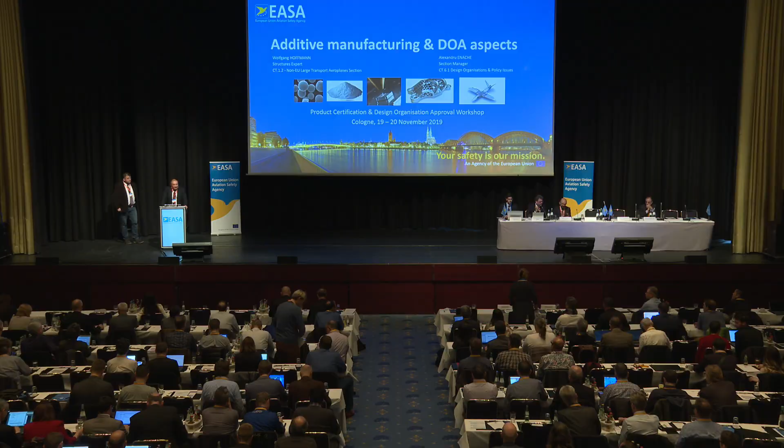Yes, we are here this morning to try to provide you some information on additive manufacturing and some DOA aspects related to this. First of all, thank you for proposing this topic to the agency for this workshop. In the survey we ran before the workshop, additive manufacturing scored quite high, so that's why we are here today in front of you.

How we built this presentation? Together with Wolfgang, who is a structural expert in the large airplanes department, we thought to have two parts. In the first part, Wolfgang will go with you through some technical aspects of additive manufacturing, including challenges, the EASA strategy, and some events we are organizing on this topic annually. Also, he will present you some developments in the area of industry standards and some available guidance material.

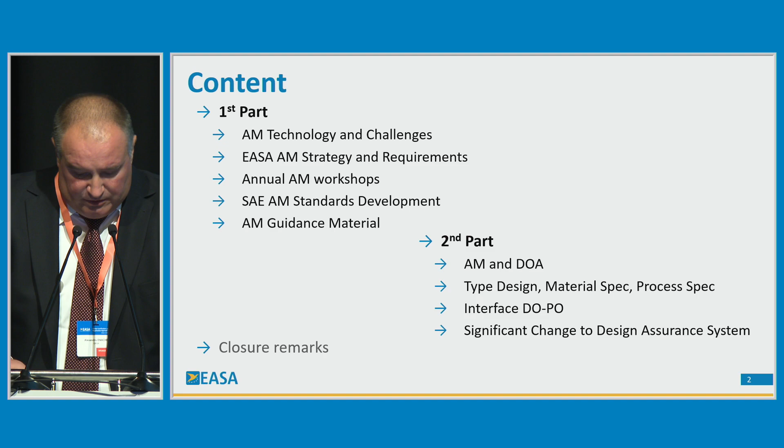In the second part, I will touch on some DOA aspects: type design, material specification, process specification, interfaces, in particular with production organizations, and also what is the impact on the DOA, whether we have a significant change or not, when a DOA is contemplating starting additive manufacturing activities. And in the end, some closing remarks. So I will invite now Wolfgang to go with you through the first part. Thank you, Alex.

I have to take a deep breath because there are a lot of people here. Let's put the focus on you first. May I ask you a question? How many of you can raise your fingers, have to deal with additive manufacturing technology currently? Okay, well, it's somehow congruent with our general observations. So I think I can focus a bit more on the first three introductory slides, which are more technical, to explain what it is.

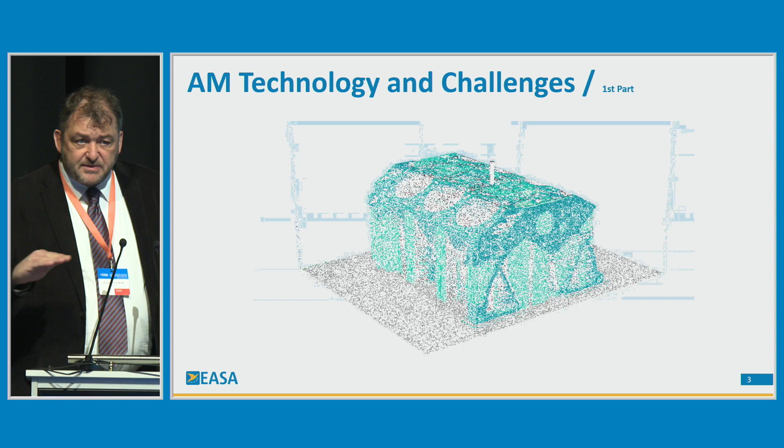But there are different technologies. They all have one thing in common: you have meltable or fusible material, and you melt it layer by layer and build up the part after a certain long time. Different technologies for this are available, so you can do this with laser melt techniques, where a laser is melting the material, or with an electron beam, which is also melting the material. In detail you have slightly different possibilities with the methods, and advantages and some disadvantages when you compare them.

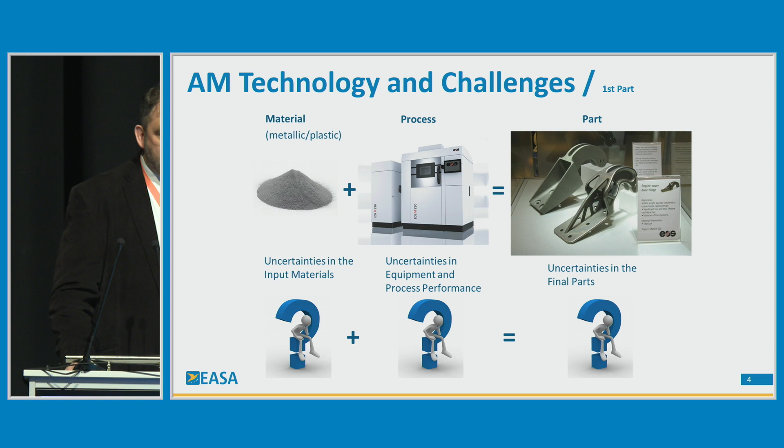So we go to the next slide. When we see this technology, it's quite nice actually. You have a starting material, feedstock material we call it, which is mainly metallic or polymers. You can get it in the form of powder or in the form of a more solid wire or piece of plastic, and all this will be melted in the second process in a machine, which you see there, which shouldn't be a black box. It should be more a white box like it is depicted here.

With white box I would like to express that you should know what the machine is doing in detail, because it may have influence on your material which comes out, on structural strength or fatigue properties. And then finally, after the print process, you will have some nice shiny parts. They're looking good, just ready for installation, you would think. But this is not really the case, so you would have to do some post-processing for this part.

So that means surface finish to remove the surface roughness, which also can initiate cracks. And you would have to be sure that the bulk material is really okay, no voids in there, no hollow things with unmelted material. And so you have a lot of uncertainties in the final part. You have uncertainties in the machine, and you have uncertainties in the input material.

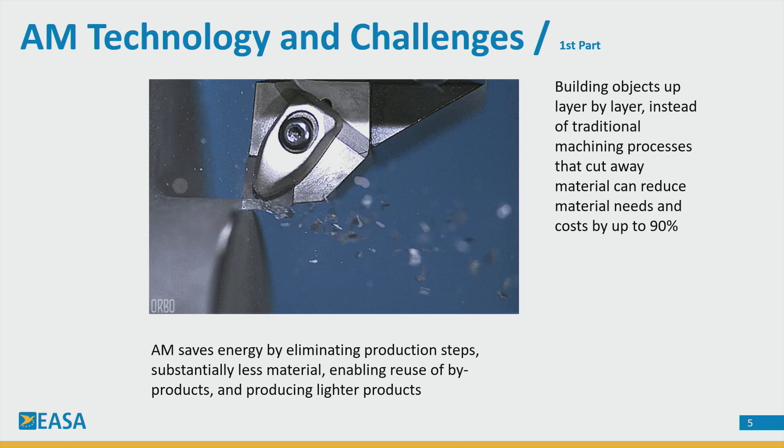So this is the old era, you know. We have a big piece of metal. We machine it so that we finally get the form or the shape of the part. And of course, you are producing a lot of metallic waste. You would have to reuse this, and so it costs a lot of money. And this is a big disadvantage.

And with additive layer manufacturing, you can build an object with just the material you need, more or less. You build it up layer by layer, and you don't have so much debris. And you have other really big advantages. You can reduce the material needs and the costs up to 90%. This is a maximum value, I would say. And through specific design you can also do a tremendous weight saving, up to 40%.

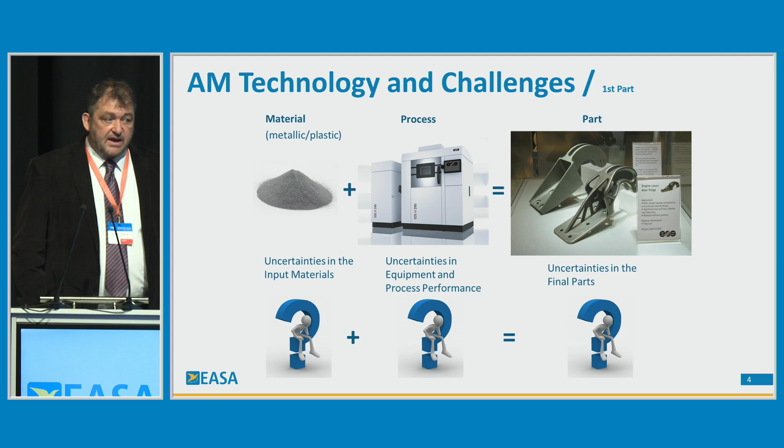So the parts which you see there on the right side: the part in the background is the original part, and the part in the foreground is the part which was additive manufactured using a specific design, where you just leave the material where you have the load path transfer. So for this part you can really have a weight saving of 60%. This is quite something. Okay, going back again. So we don't want to do this anymore. Of course, the optimum thing would be if you could print everything.

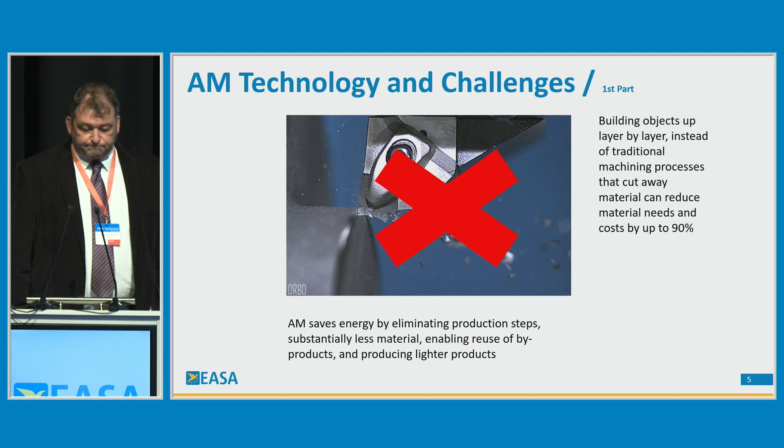And there we have to propose our strategy. As an airworthiness regulator, we are being approached by such a technology, and we don't know that much about it. So we have to gather some experience, and we have to rely on information exchange with the industry to understand the technology and the processes behind, the product which is being produced, and its dedicated use in aviation. So this is a very important thing, number one.

The second one is we have to identify potential safety and environmental risks. Is there a specific risk on the part when we don't know the material properties, or there's a widespread in material properties? Of course there is a risk, and we have to be aware of this and try to mitigate those risks. So we are working closely together with the industry to get all this information and discuss all those things, and also with the NAAs, who are responsible for surveying the POAs, the production organizations, who are applying those machines.

The further step is, once we are aware of the risks and how we can mitigate them, we have to monitor the evolution. The machines will be developed further. They started initially with a one-laser machine for metal melting. To make it easier, I will just refer to the metal process; there are others as well, but there's too little time to explain them. For metal melting done with a laser system, they started with one laser. In the meantime, we have quad laser machines, so 4 lasers doing the melting independently.

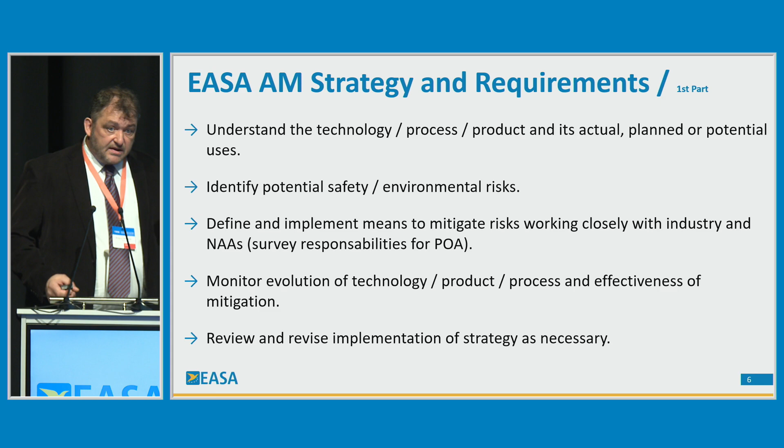And this is a further development, and we have to see if this has an influence on the product as well. And we have to check if our means of mitigation are still effective or not, or if we have to do something more. That means we have to frequently review and revise the implementation of the strategy as necessary. These 5 points are our main strategy: first of all to understand, and then to track everything and the further development.

So I guess one of the main questions from your side is, do we need any new additional requirements to cope with the new technology? So we have to do more effort to show more substantiation, which is, of course, involved by spending more money. And this is possibly not very much appreciated by you.

The answer is, currently we don't need new requirements. So our top-level requirements, Part 21, the CSs, are enough. They cover everything. I will come later to the main paragraphs which are dealing with this. And we mainly would like to remind how repairs and design changes have to be done in detail, and what is the impact of AM on design organizations or on production organizations and on maintenance organizations. So this will be explained a bit more in detail in the second part by Alex.

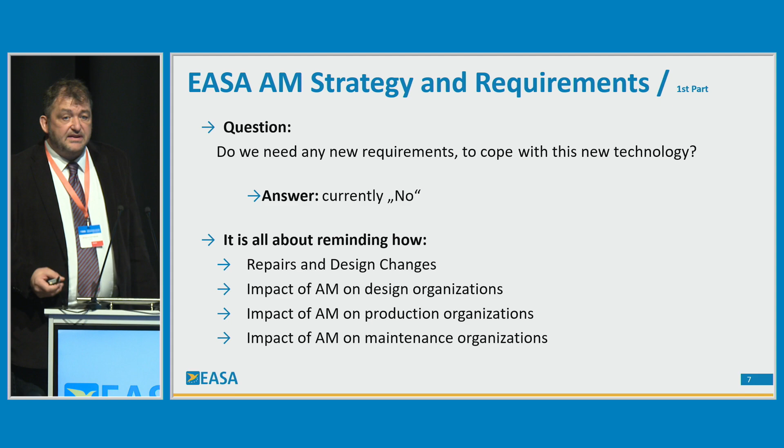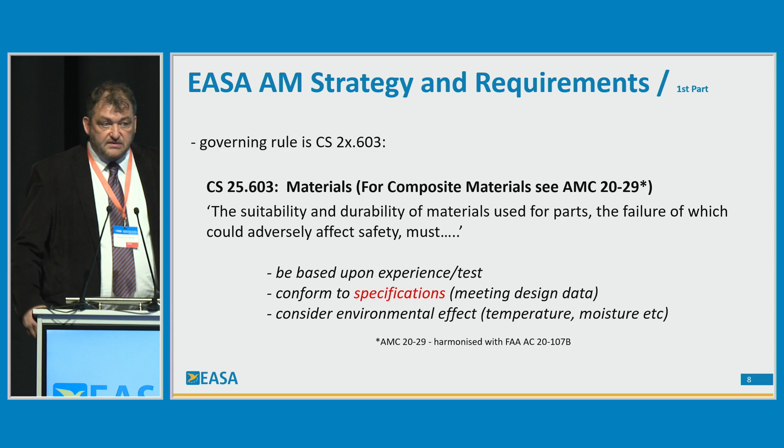The requirements. So the governing rule is the 603 requirement for materials. It says the suitability and durability of materials used for parts, the failure of which could adversely affect safety must be based upon experience and test, conform to specifications, meeting design data of course, and consider environmental effects, temperature, moisture, etc. So this is the requirement we start with.

The next two about the materials is, starting with the 605, the fabrication method, and this is the additive manufacturing, obviously a new technology, a fabrication method. They must produce a consistently sound structure, so without any spread of material properties, in the best case. And this is where we have to be sure. So if a fabrication process, such as gluing, spot welding, or heat treating, or let's say the laser welding process comes close to the additive manufacturing with laser melt methods. So all this requires a close control to reach these objectives.

The process must be performed under an approved process specification. And to the process specification we come later. It's also a very important thing. This belongs to the EASA strategy as well, that we are involved in developing those process specifications. And we have the B, each new aircraft fabrication method must be substantiated by a test program. Okay, that says all. So when you buy such a machine, it's a new method, you have to do some substantiation.

What would be the extent of this substantiation? Well, it would depend on whether you would like to produce critical parts, safety critical parts for an aircraft, then there's a lot of substantiation, and we would switch to the 613. If you have less critical or non-loaded parts, let's say polymer material in the cabin, kind of armrest cover, well, you would possibly just have to do the fireproof testing, and that's it. So this is not safety relevant if you have there a broken material finally. So that shows a variety of parts. It depends on the criticality.

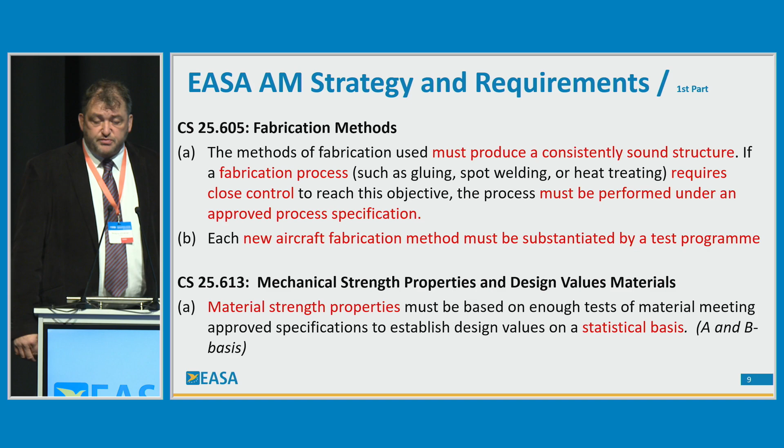So the other side of this is, to gather experience on this new technology, we just arrange workshops with the industry and with other authorities together. And the first of them were quite generic, just doing presentations to see how far the people are, what are they doing.

We did the first one in 2016 in Cologne, and a second one the year after, and it turned out to be a good thing to do every year. So you see the development. The first two were generic, to get a rough overview of what is being done with this technology in the industry. Then it gets more specific, similar to this workshop here, with breakout sessions before the presentations, so that all participants can really discuss the points which are very important for them, to discuss their needs.

We've tried to do this as well now, so we've changed to a more specific topic on additive manufacturing. One of the first ones was 2018, with machine knowledge and training, so we invited machine producers and users, and let them discuss what are the needs. We found out that for the machine producers, it was very important to know about the requirements in aviation as well, so that they can tune their machines and understand the big need for precision and repeatability of the material.

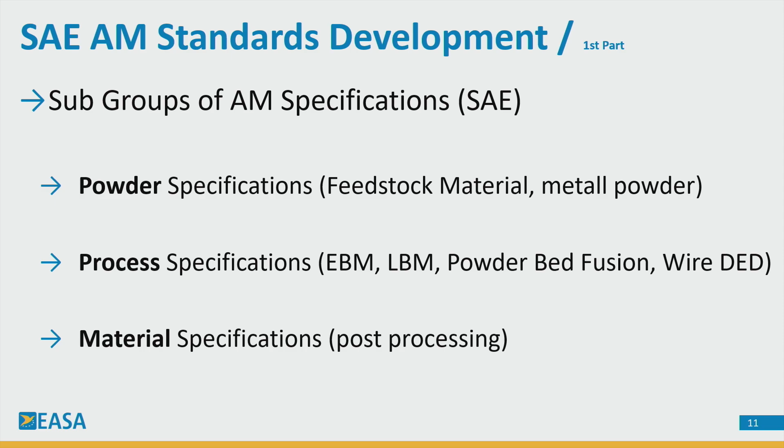Do we have to do post-processing of the material? For example, there's a very famous hipping process, hot isostatic pressing. For some small voids, which are let's say non-really melted powder in the material, for small areas, you can heal this material via post-processing. The hot isostatic pressing is done at high temperature for 3 hours and under 1,000 atmosphere. You leave the material there - it's short below the recrystallization temperature, and it will be healing, and small voids will be vanishing there.

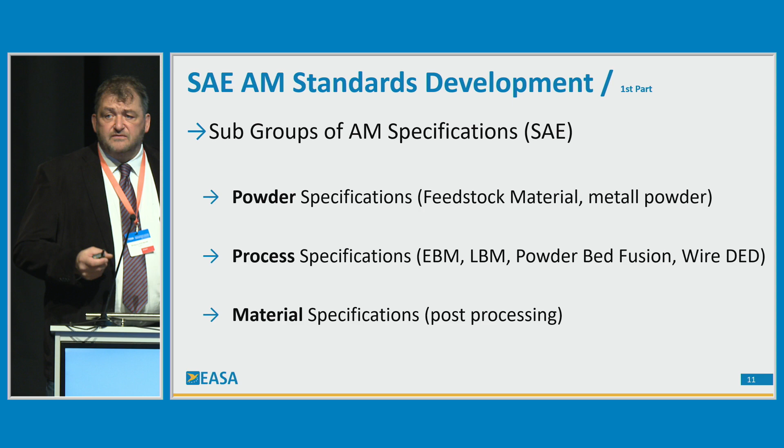So it doesn't prevent you from doing fatigue tests on those samples as well, but it's solvable. Some OEMs have shown when they put a lot of effort into this, they have a high repeatability, even higher than for castings. For castings we have factors we put on those to cover flaws in the material. For additive manufactured parts, some OEMs who put a lot of effort and money into this found out that if we do so and hold all processes stable, we even don't need a factor like for casting. So it seems to be a good way.

This is what we are working on. The green ones are the published standards from SAE.

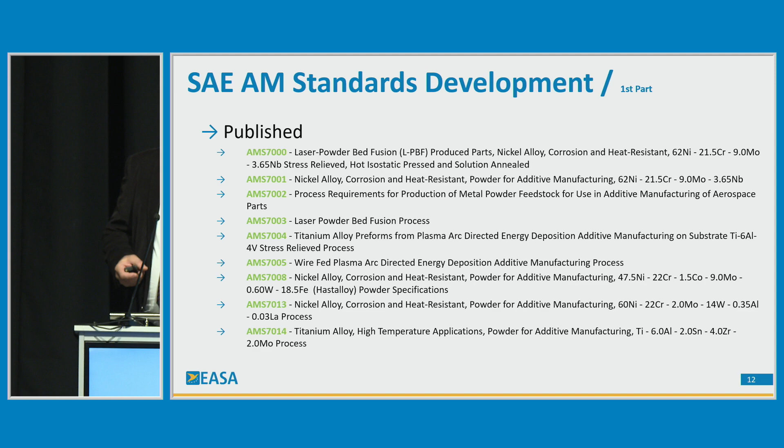You can just briefly read. You have powder specifications, laser powder bed fusion process specifications, the 7003, and so on for different materials. You have Inconel materials, and the most advanced one is titanium 64, so it's 90% titanium with a bit of aluminum and vanadium.

Those are already published, so you can purchase them, and if you want to use one of those materials, the strong recommendation from our side is please go into the specifications and try to work along them.

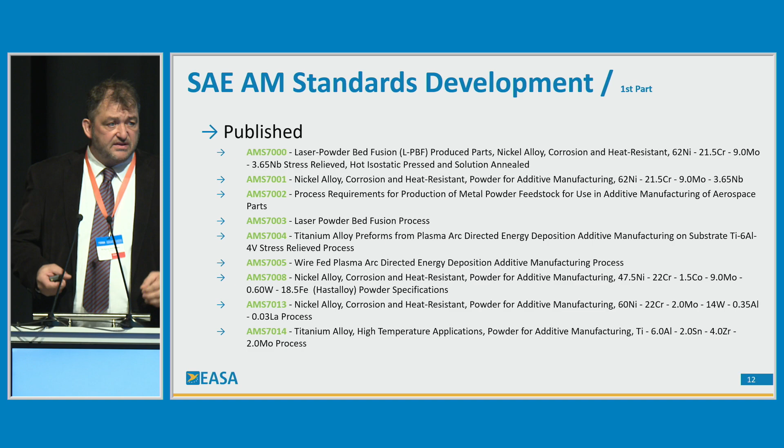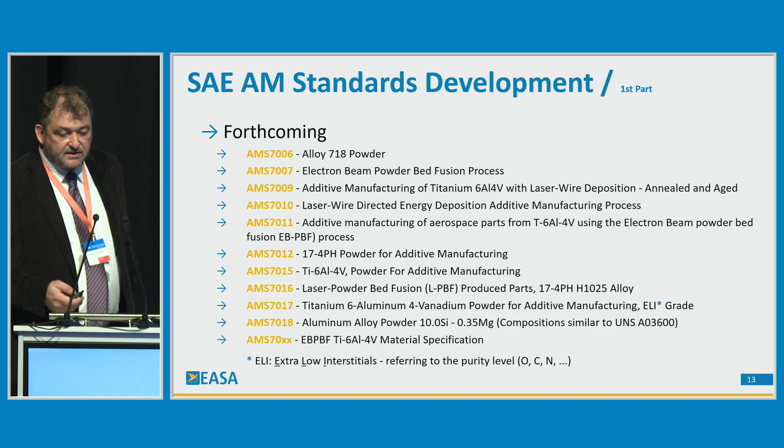Those forthcoming ones are these here. They are still not published, but they will come. For example, a process specification for electron beam powder bed fusion and so on. This is something where you can take some time and just go through it and make yourself confident with it.

A further thing is we try to give you a bit of guidance. For that reason, we are tracking the technology, trying to get information to be experienced, and not to say we can't say something on this because we don't know anything. We know indeed something on this.

In the meantime, we have issued in April 2017, just one year after our first workshop on AM, a certification memorandum which doesn't invent something new. It just reminds you what our expectations from regulator side are, which requirements are the most important.

I've just marked the red ones there. These are the structures requirements, because I'm the structures guy. There are some others - we see engine requirements, propeller requirements, Part 21, and so on. Those are mentioned there, and we have explained why we need those requirements and why you have to put more focus and effort on this under the light

of additive manufacturing. And of course, the purpose and scope of this guidance is that we would like you to really work on our expectations.

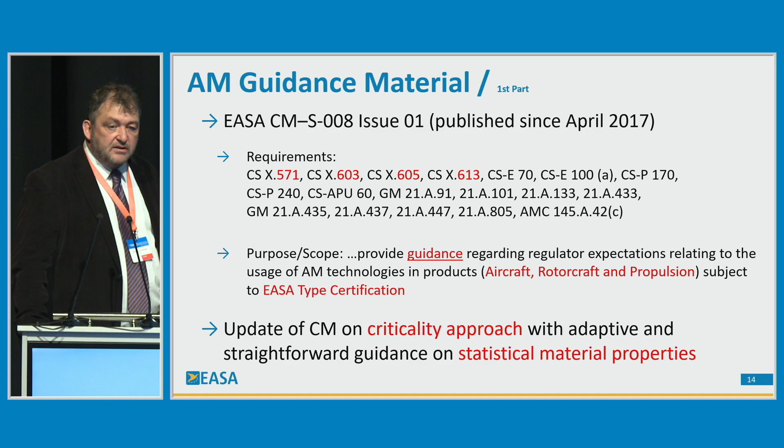yes, the statistical material properties - for them you may get an exemption for non-critical and less loaded parts. This is the idea behind it.

And the last slide from my side is: we will give you also some guidance for the POAs, DOAs, and MOAs. There's a possible need to increase awareness of closer relationship between those organizations, because of course there is an interface, so we would like to give some guidance on that, and to make you aware of the existing rules there.

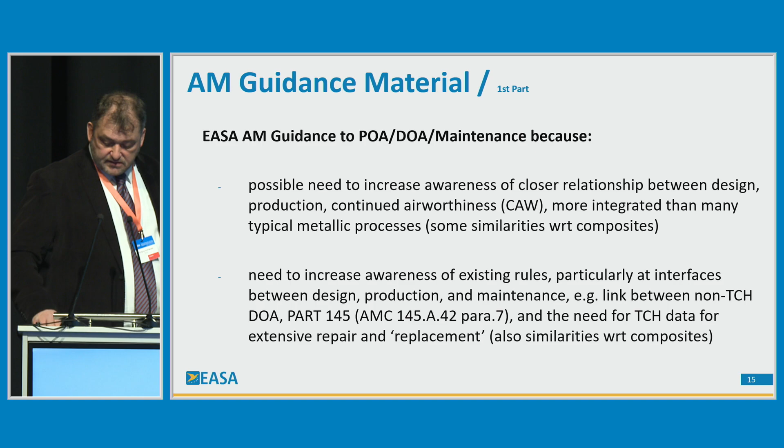Thank you, Wolfgang. After you have seen a little bit of technical aspects of additive manufacturing, we'll go now through some DOA aspects. First of all, I would like to show you a short, small statistics. We did, through the DOA team leaders, at the beginning of this year, a survey.

And according to the answers, still a limited number of DOAs are involved in additive manufacturing activities. I've seen earlier when Wolfgang asked you, I've seen a lot of hands in the air, but still that might be not so many DOAs yet involved in additive manufacturing.

There is also a large gray part here, so some of you maybe have not yet made up your mind and not provided feedback to us on this topic. I will come back at the end with, let's say, a recommendation for this.

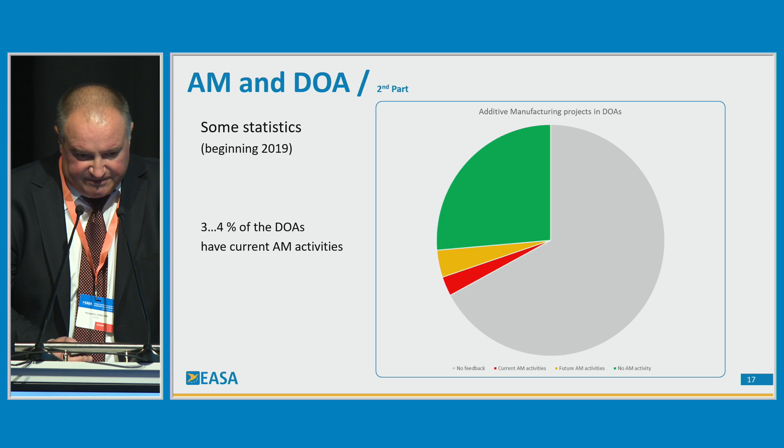Now, you may ask how a DOA may start additive manufacturing activities, and I took maybe a simple example. Hopefully nobody will recognize your design data here.

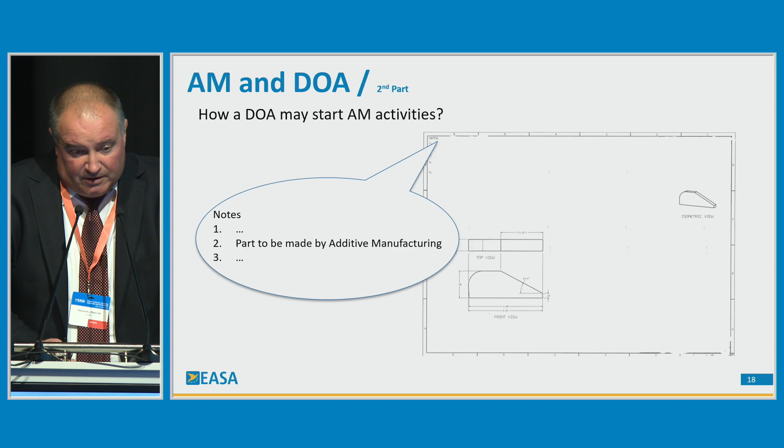If you want to manufacture a part through additive manufacturing, it will be enough to say in the notes that this part has to be additive manufactured. Maybe the answer is no.

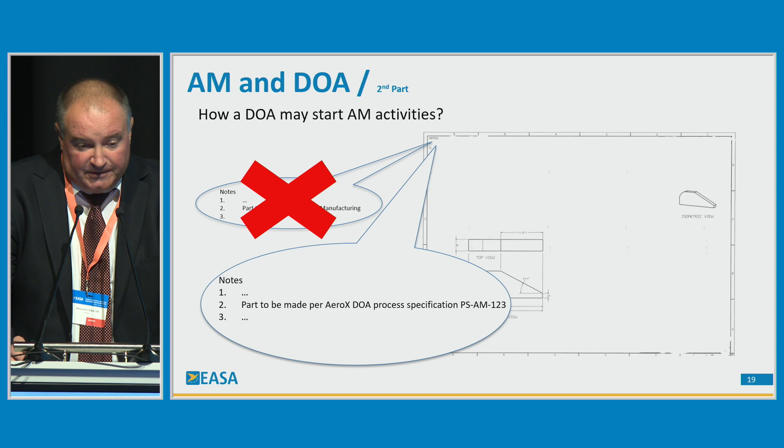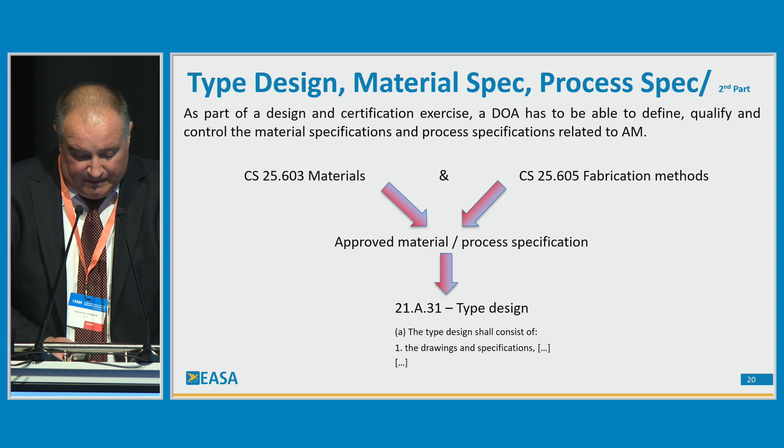You may need to actually refer to a process specification for doing this part through additive manufacturing. You have seen from Wolfgang's presentation that this process specification is particularly required in some of the CS requirements, some of the airworthiness code requirements. And if this is the case, then obviously your manufacturing specification, your material specification will become part of your type design. And as such, we are expecting a little bit more elaboration from the DOA side.

You have seen already that additive manufacturing is depending on a large number of factors. And depending on the particular application, loaded part, non-loaded part, plastic, metallic, different type of processes involved, you may have to come up with a process specification. I just want to present a few items which might be part of this process specification. Don't take this list as an exhaustive list, it's not.

You have to explain what is the scope, what type of additive manufacturing process you are defining, what is the applicability, what are the limitations, for example what kind of parts you may manufacture according to the respective specification. What are the materials? Of course you will have to refer to material specification, but you may also have to add handling requirements for the material, storage requirements, and so on.

What is the machine, equipment, and tool used for manufacture, including the machine manufacturer, the type of the machine, calibration, maintenance. Facilities are important as well. The machine environment may impact the result of the manufacturing process. And then you have to describe the process, the preparatory work, the printing steps, what are the key parameters, what are the post-processing methods you will apply to the particular manufacturing process. And of course you have inspection and test requirements and some part markings.

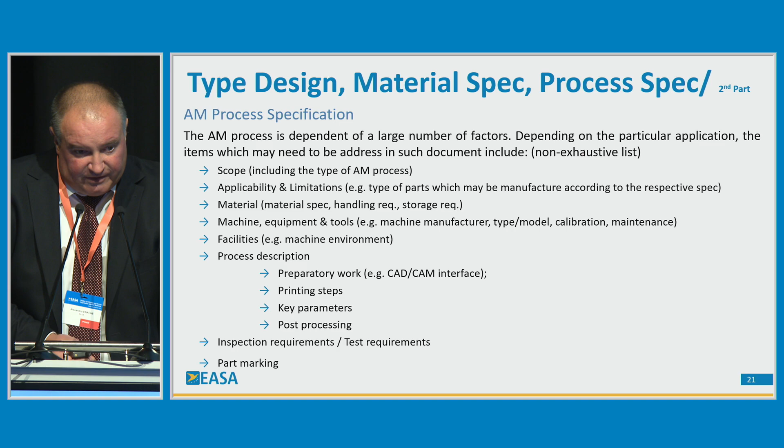You have seen that there are already quite a number of industrial standards available. You may refer in your process specification to these standards as applicable. But you may also need, depending on the application you intend to use the additive manufacturing for, to qualify the process to demonstrate that it complies with the defined specification and that the parts can be manufactured in a reproducible way.

I want to highlight here that this material and process specification are not only part of the type design, but answering to some CS requirements, some airworthiness requirements, they can also be considered part of your compliance demonstration. And as part of type design, the changes in material and process specification are, of course, subject to the changes to type certificate process.

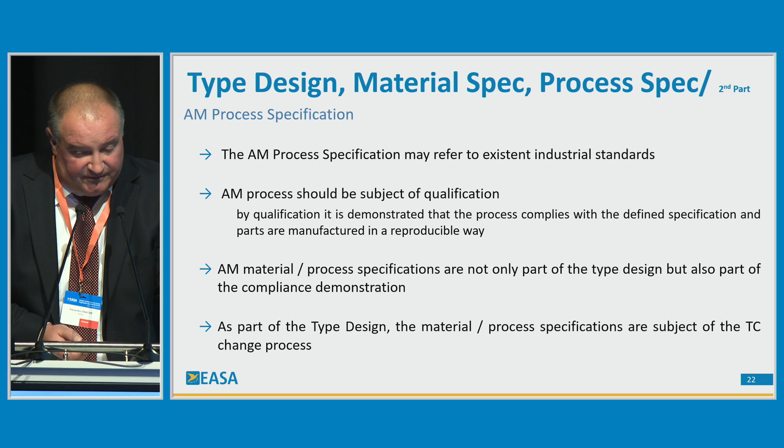Now, I think Wolfgang already mentioned a little bit on interfaces between design and production. There is a clear link. There are specific aspects you need to address in these interfaces, like transfer of design data, generation of the manufacturing data by the production organization, and as I mentioned in the previous slide, the qualification of the additive manufacturing process. This is all done together with the production organization.

I've already seen, sitting at the table there, some of the questions you started to ask. We'll have maybe a little bit of time at the end to address some of these questions. But indeed, there are additional challenges if the manufacture is done under a maintenance environment and not a production environment. We are looking into these aspects, and for the moment I would say that additive manufacturing in a Part 145 organization is not possible according to the current rules we have, but we are looking into this aspect.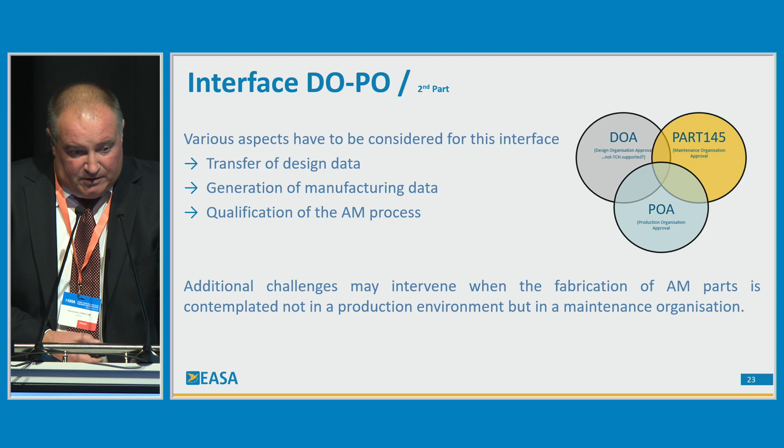Now, significant change for a design organization or not? Again, depending on the particular applications in which you intend to use additive manufacturing, there are quite a number of activities you need to develop. And of course, we are looking to have these activities performed according to your defined procedures.

So you need to have procedures for defining process specification, for defining material specification, and for qualifying them as needed. If you don't have such procedures, according to the requirements we have in 21.A.247, we will consider that if you intend to introduce this procedure, it's a significant change to your design assurance system.

However, even if you already have these procedures in place for defining process specification and material specification, if you intend to use these procedures for the first time for additive manufacture, I would encourage you to discuss with your DOA team leader and offer us the opportunity to be next to you when you are starting this new activity.

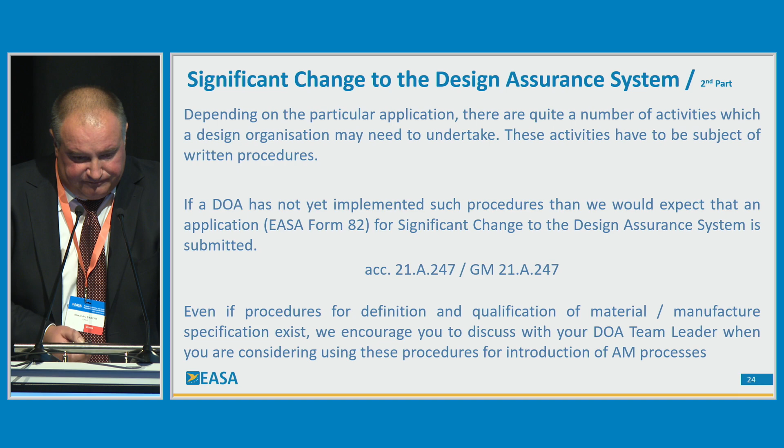Of course, reviewing your significant change for introducing additive manufacturing, we will look to the usual topics for this, which is type design definition, configuration control, how you classify changes, how you establish a certification basis, how you use the qualification of the manufacturing process, what kind of testing is involved.

You may use suppliers as well, so we need to look to the interface with the suppliers, with the production organization, and to look to the training as well, which is important for a relatively new technology which you intend to start activities on. We will work normally together with production, with the POA team, which can be an EASA team or an NA team, depending on the case.

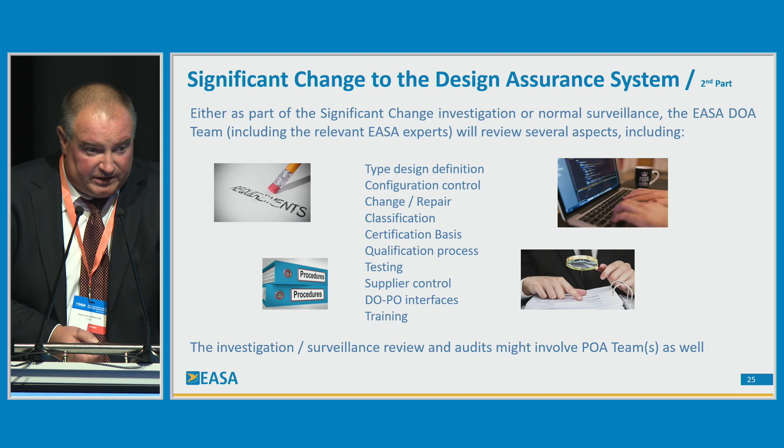Wolfgang showed you some of our events which are organized each year, so I would recommend you to follow these events. There are dedicated events where you can, of course, get more information on this topic. And follow also our news, for example, the latest issue of the J News has a small article on additive manufacturing as well.

Thank you. And if we have time, we can probably take a few questions. Yeah, I think we can take a few questions. Some of them that were asked are already answered by your presentation or Wolfgang's, but there are still a number of questions. I don't know whether, Wolfgang, you want to start, or Alex, we have some on the screen. Yes, I can take one of them.

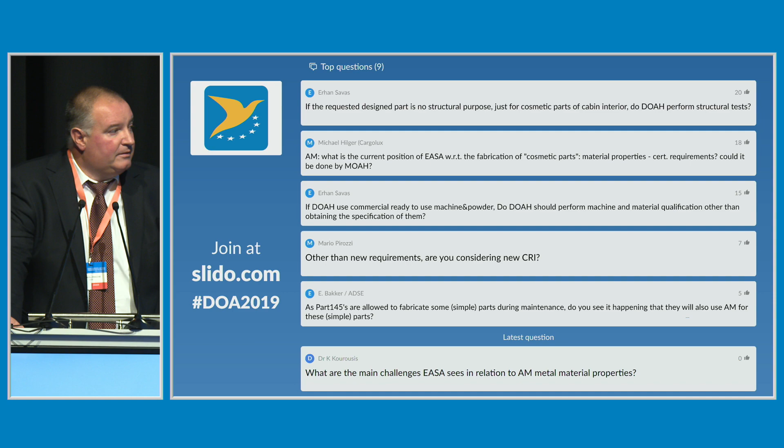Okay, next one, possibly from Erhan. If the requested design part has no structural purpose, just for cosmetic parts. This is what I've tried to explain, that there are indeed some cases for non-critical, less loaded parts, like the famous coat hanger or armrest covers out of plastic, where you really have reduced requirements to fulfill. And this is what we are coming up with in our second issue of the CM. So we will try to give you there some guidance where you have easy certification, let's say, and where it would become a bit more difficult.

This is according to the 613, and first of all, you do a classification. What do you want to manufacture? Critical, less critical, loaded, non-loaded. And due to this classification, you go, possibly when it's critical, into the 613, and you have to do the A and B basis. This is explained there as well in the AMC material. So you finally have to do a lot of samples and show that your process is stable and the material properties have a confidence value of 99%. So that means almost always the same properties.

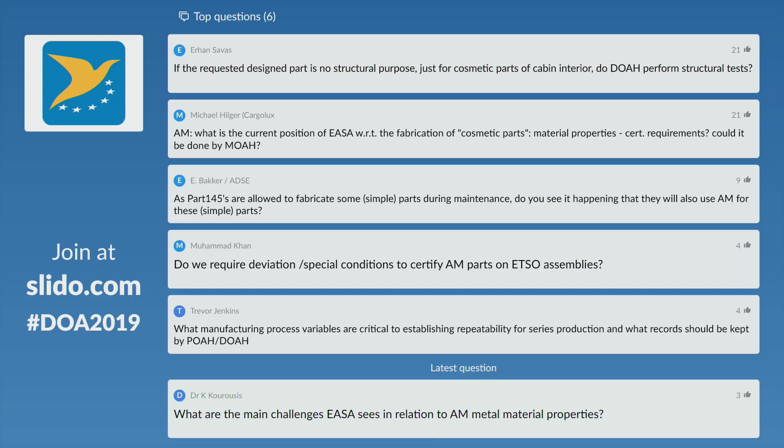Okay, maybe one more question due to the time. I don't know who wants to choose one. The first ones I think were already answered. There's one, may I take this one from Trevor Jenkins as well? So this is about the repeatability. Well, I think it vanished from the list. The second last.

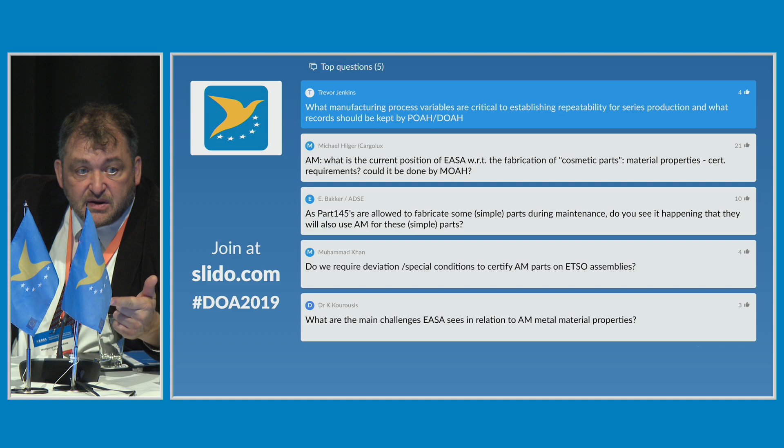Yeah, exactly. So what manufacturing process variables are critical to establish repeatability for series production? This is exactly what we try to transfer with the standardization material. That means the process specification, the material specifications, which had been worked out by industry and authority in the SAE working group, and of course also in the ASTM working groups.

So you would have to take those materials, and then you can see what is being considered as the most critical parameters due to repeatability.

The one on deviations and special conditions by additive manufacturing parts on ETSO assemblies. I don't know whether you can answer to that. We can take that question back and try to answer it offline.

Okay, thanks a lot, Wolfgang and Alexandru. And with that, I would welcome Gilles Garouste to represent the industry views. The CCOM is one of the advisory bodies to the agency under the Stakeholder Advisory Board. And we have regular meetings with them. The next one is actually next week.

And you as industry globally are our direct partner, and it's always good to have also direct feedback from you on achievements, on things that concern you. That's why we asked the CCOM, and Gilles offered to do the presentation on behalf of the chairman to talk about the advisory board and the CCOM. Thanks, Gilles. Thank you, Marcus.

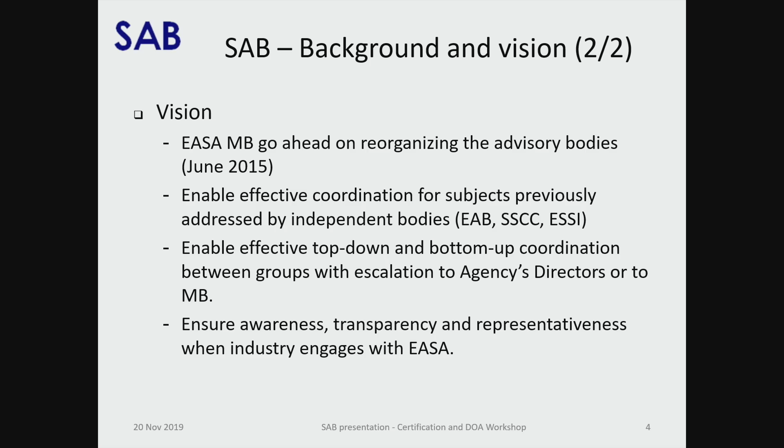So the idea was to reshuffle those groups into a single structure with a better top-down and bottom-up coordination, and the possibility, when there are issues identified at the lower level of the advisory structure, to discuss that with agency directors or to the management board if needed. A key point for all those participants in this advisory structure is to make sure the community is aware of what is going on, to be transparent, and to be representative of a sector.

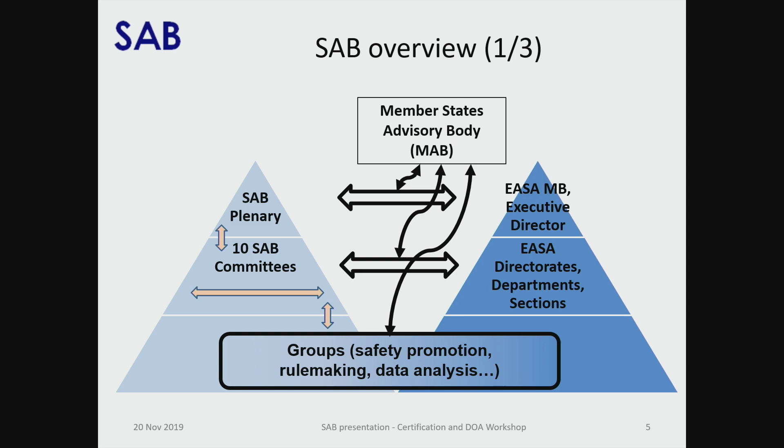So just a picture explaining the structure. So on one side you have the SAB, the stakeholder advisory body structure. On top of it you have what we name the SAB plenary. It's around 35 members representing all sectors.

I mean unions, pilot unions, cabin crew unions, air traffic controller unions, commercial operators, airsport, manufacturers, EU, non-EU, maintenance organization, navigation service provider. So it's the whole range of companies involved, which have to comply with EASA regulation, are represented there. We have also aeromedicine, and so it's a large list. All that is made public on the EASA website.

So below the SAB plenary, we have established a number of committees dealing with specific business. I will detail that on the next slide. You have to understand that we have the industry side of the advisory body under the SAB, and there is a similar structure under the member states, which is named the MAB for Member States Advisory Body. And we have exchanges between those groups, between SAB groups and MAB groups, and with a deep involvement of the EASA people at the level of director, experts, head of department, section, etc.

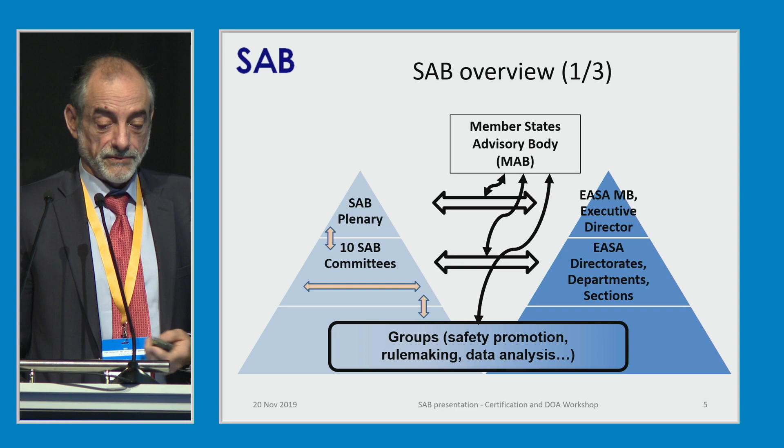The structure of the SAB, again, it's the industry side. So on top you have the plenary SAB, and then you have two kinds of groups, which are committees or technical committees. So the technical committees, you have a list of 4. One is missing, it's the drone committee. It was proposed several years ago. Its implementation has been delayed, so maybe the agency is ready now to reconsider its establishment, but we have to address the drone aspects as well.

So you have the certification committee. I will detail it later on. You have a commercial aeroplane safety committee, which is populated with people involved in managing safety in organizations, manufacturers, operators, pilots, etc. You have the general aviation committee and the rotorcraft committee. So those committees have a role, let's say a more strategic role. They should look ahead and not just discuss ongoing rulemaking tasks just decided or close to deliver something.

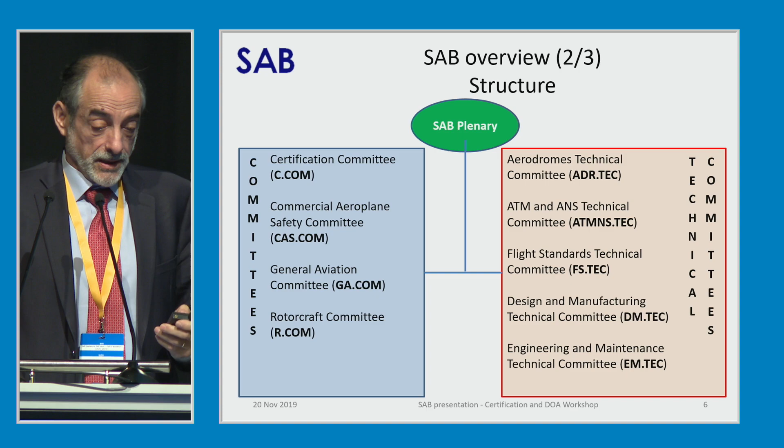For example, the position: in the previous setup under the EAB, we had situations where, because a single organization was opposing all the others, the EAB, the EASA advisory board, was silent. And so we agreed when preparing the rule of procedure that this cannot happen anymore, and that if there is a dissenting view or a minority position, it will be fairly reflected in a position, but there will be a position instead of nothing before.

So we have clarified the role of the chairperson, secretariat, contribution of the agency in the functioning of the SAB structure, how meetings should take place, and working arrangement. And finally, one of the novelties was to require all those groups to deliver an annual report.

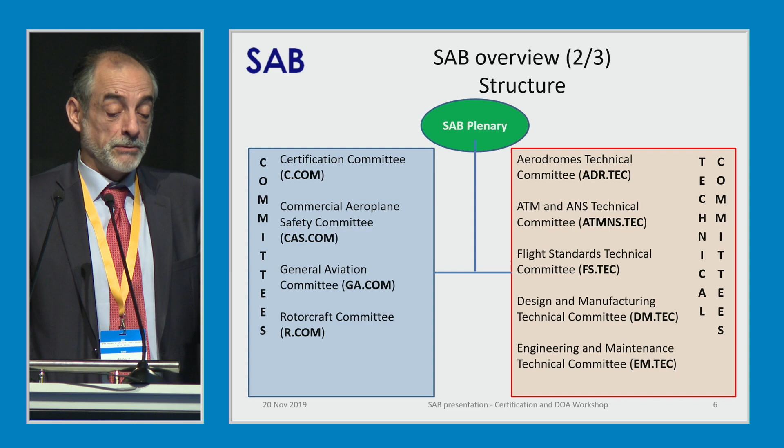It was never done before. We have clarified the distribution of tasks between the miscellaneous SAB groups, because looking at the slide before, you can imagine that if there is an activity dealing, for example, with the rotorcraft committee, it could touch also the flight standard technical committee or the DM, design and manufacturing technical committee. And so we had to clarify who is leading what activities.

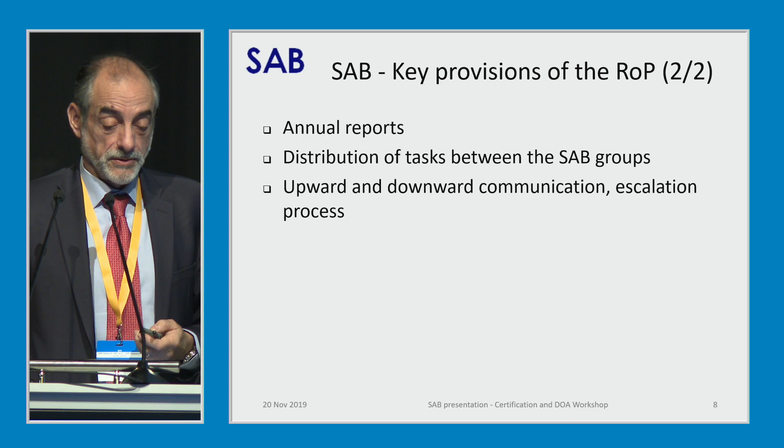We have to make sure that what is being done is transparent and that the community is aware, and I think we can do better in that respect. We will work on it. It's a continuous activity, and we have to make some progress. And we have to make sure we are representing the interests of the stakeholders. So this is, well, good to say.

It's obvious, but another item we have highlighted in the code of conduct is the need for associations which are part of the SAB to make sure what is being done does not stay within that association. So they reach out to other companies for the sector they are representing. And also there are some policies. If somebody is not complying with this obligation, that person can be replaced.

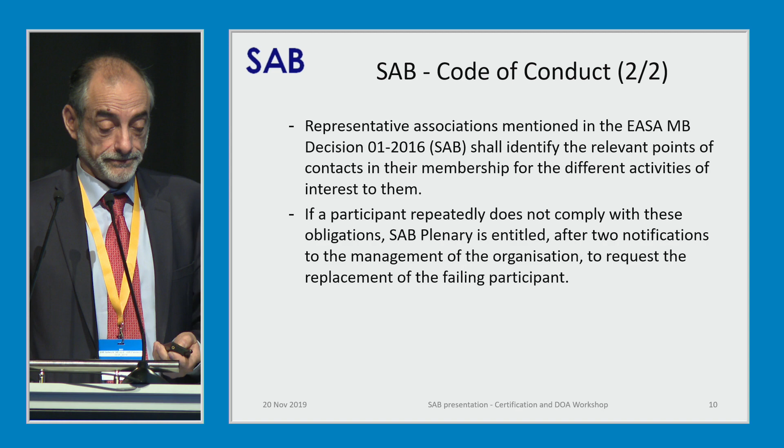So in a nutshell, it's not a single group, it's a structure of groups, as you have seen. It's formal because it is established under the basic regulation, so it's something that has to deliver and has to exist. So we have to make use of this tool which has been provided to us by the legislators through the basic regulation, and they are all at your service.

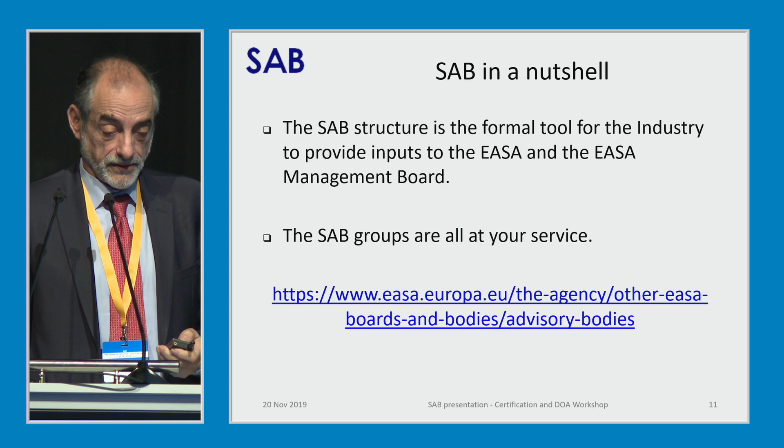So I've put there the page of the advisory bodies on the agency website, and I encourage you to take a look at that page. And I've found that we need to improve it, and that will be done quickly. So now, what is being done within the certification committee and later within the DM.TEC.

So the certification committee has to stay at high level. We are not discussing a specific rulemaking task unless it's an extremely critical one. So the C.COM has to make sure the topics are properly handled by the technical committees. And it's a privileged way of interfacing with the certification directorate management. Marcus is attending all those meetings. Rachel, as certification director, is coming at the end of the meeting to have a summary of the outcome.

So it's a privileged way of communication with the management within the certification directorate, and it's not limited to the certification directorate. When we are discussing digitalization, for example, we have people from the resource and support directorate attending the meeting, and people from the strategy and safety management directorate coming as well. So it's a tool for you to address issues at the level of the management within the agency.

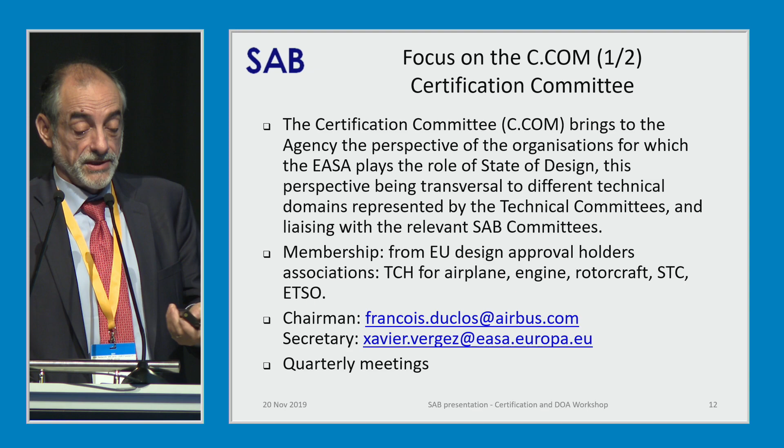So the chairman is François Duclos from Airbus, and the secretariat is ensured by Xavier Vergez, whom you saw yesterday, and we are holding a quarterly meeting. So there is a continuous exchange between this group and the agency management dealing with the certification topics. So what has been discussed in the last cycle?

So first, to agree on the high-level objectives that are shared with the management board and which are also reflected in the EASA document you should have read, which is the European Plan for Aviation Safety. So it's a key document. It has been improved a lot over the years, and it's a document you should take a look at to make sure what is of importance for you is taken into account.

If not, then you can ask the CCOM chairman to take your concern into account, and then we will use all the SAB system for making sure your idea is taken into account in the planning of activities with the agency. So we are focusing currently on what is related to safety, what is related to the level playing field, and what is related to efficiency and proportionality as well.

And then from the activities undertaken in the certification committee and all the other SAB groups, the result is an SAB plenary document which is sent to the management board as a list of topics on which we would like to see progress made by the European institutions.

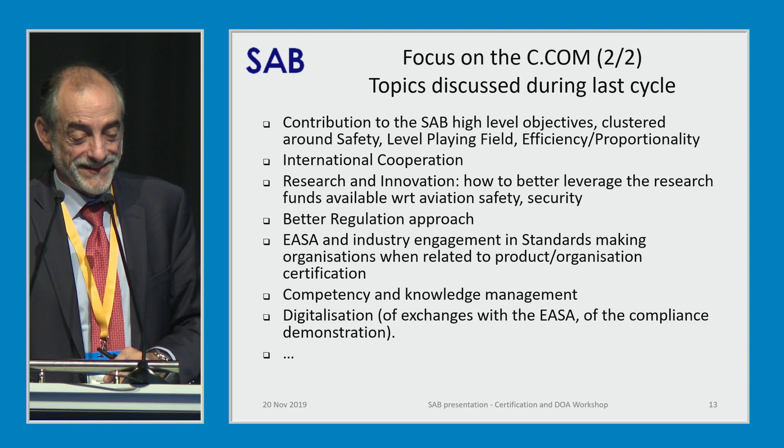Digitalization is also taking a lot of our time. What we are talking about is streamlining the exchanges with EASA. Earlier, when I heard that you expect to access in a clearer manner the certification basis of a product for designing a post-TC change, this is coming with digitalization. There are tools the agency is working on - one is named e-Rules, which may not in the first step deliver the service just expected, but the plan is to deliver it. The C.COM is a privileged tool for discussing these topics with the agency, and much more - so much for the C.COM.

Then quickly, DMTech. DMTech is more focused on regulations related to product certification, manufacturing, and the organizations behind them. The membership is larger than the C.COM - around 25 members from manufacturers, EU and non-EU, from commercial or non-commercial operators, from the training industry, and even from the sport sector.

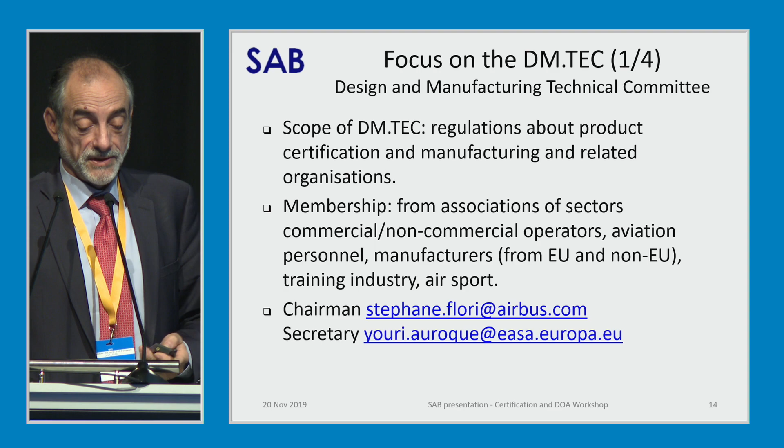The chairman, again, is an Airbus guy, Stéphane Flori, and the secretariat is ensured by Youri, who you've seen yesterday on the scene. The main mission is supporting activities related to the rulemaking task - providing inputs, for example, when there are discussions about regulatory impact assessment or the best intervention strategy. A group like the DMTech is a privileged tool for exchanging with EASA on those matters.

In the discussion we had, the feedback from the SAE meetings, there are activities or actions you're expecting from the EASA system that could be taken on board by the DMTech, such as having a focused exchange on the internal monitoring system. That's a task the DMTech could take on board.

The terms of reference allow the DMTech to invite guests for a given meeting on a given topic. So I think we have the tool - you have the tool - for making sure your concerns are taken into account in the EASA system without waiting for an annual meeting. You will have your representative in such groups who will be able to track progress and have a continuous exchange with the agency, ensuring progress is made between workshops like the one today.

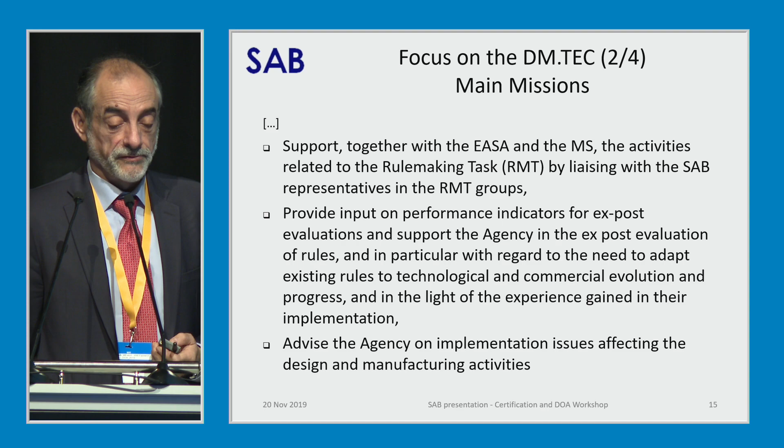So let's not get it wrong - we are not talking only about regulations, because it has also been clearly understood that there are activities such as safety promotion that could deliver the safety improvement we are expecting. I think we are all advocates that we do not need regulations when the aim can be reached by other tools, less burdensome in some cases.

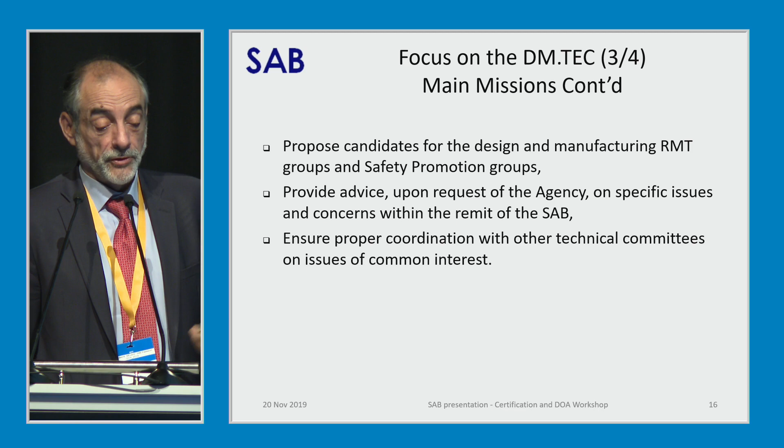Then, what they have discussed - this is an extract from the annual report. Again, they supported regulatory impact analysis for some specific rulemaking tasks. They contributed to the preliminary impact analysis, and provided comments on rulemaking tasks being designed and decided in the preliminary phase before the activity is launched. As a reminder, the DMTech is a body through which the agency populates rulemaking groups when there is a rulemaking group with industry involved. This highlights the need for such groups to be aware of who is interested in what.

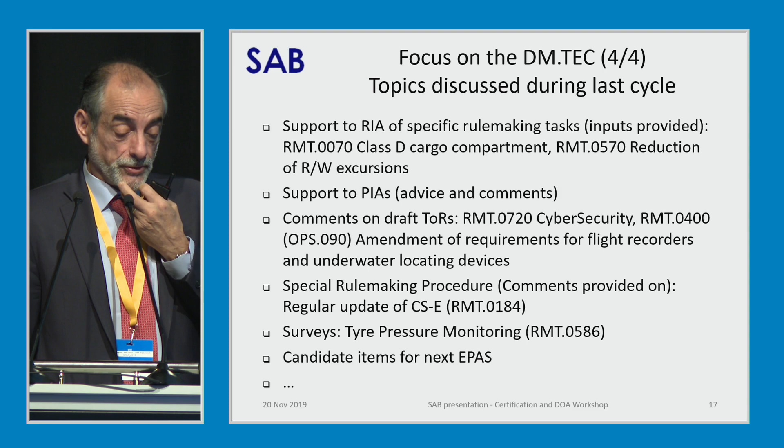And a key topic - I speak again about the EPAS, the European Plan for Aviation Safety. We are using the SAB structure as a bottom-up tool for making sure the EPAS addresses the concerns from the stakeholders. That's all - so I'm saving some time for lunch. If you have any questions.

We got a few questions, but I guess some of them are already answered. The first one is, I was surprised not to find the minutes of the meeting on the agency website, because by the terms of reference, the minutes of the meeting should be published. So the list of representatives is already on the website.

We have to make sure we are publishing the minutes of meeting as expected by the rule of procedure. So discussion to come with the agency.

Yes, they are STC holders. So in the CCOM for sure, it's Andreas - I have seen him. He's there representing the after-market business, and he's a valuable contributor. We will meet next week again during the CCOM.